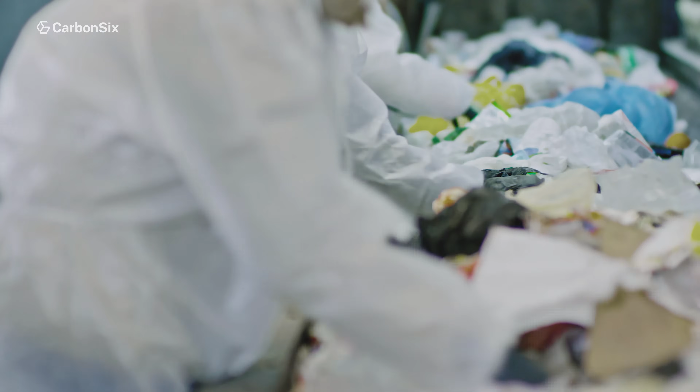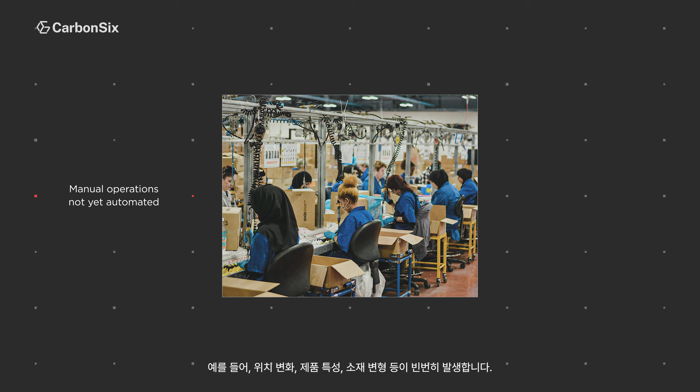In real-world manufacturing, many types of variances arise that present significant challenges to traditional automation solutions, such as variance in position, product, or material deformation.

How do we teach our robots to respond to these varying conditions? It would be costly if we had to use pendants or hand guiding to manually design the robot response every time something changes. SigmaKit is an AI-powered robot control system built to overcome these challenges.

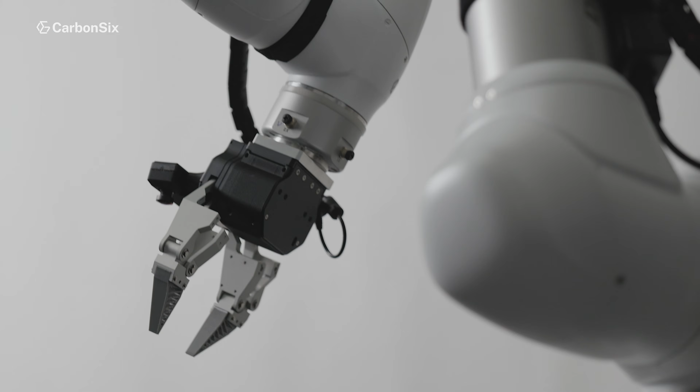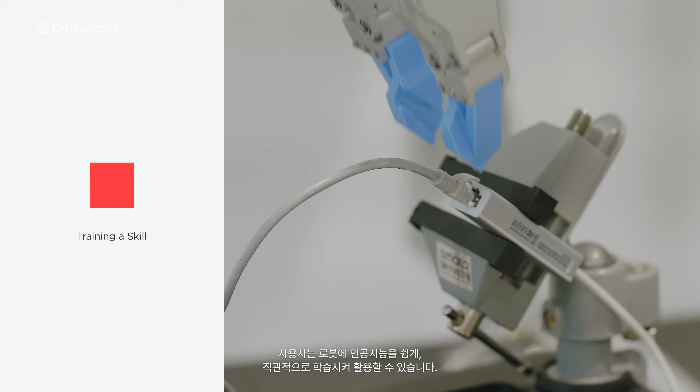Robots trained with SigmaKit respond instantly to unstructured and unpredictable conditions. Robots can be trained quickly and intuitively. No coding, no expertise required.

Developed by CarbonSix, SigmaKit combines cutting-edge physical AI and robot dexterity into a ready-to-deploy kit for industrial robots.

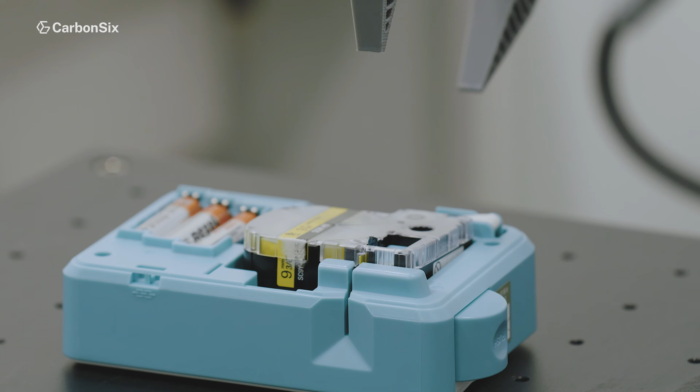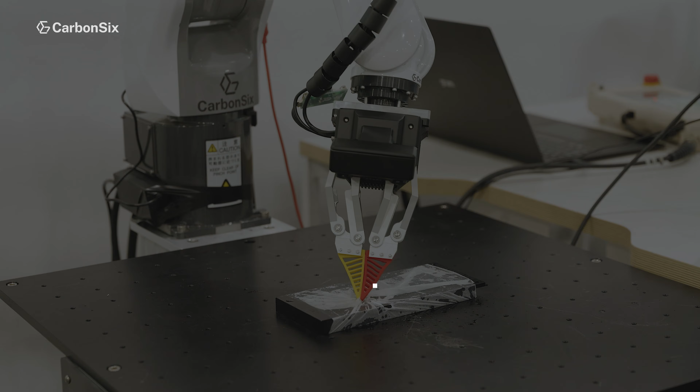With SigmaKit, robots can handle a wide range of tasks: assembly, machine loading, rearrangement, attaching and detaching, hanging, picking—even transparent objects—and more.

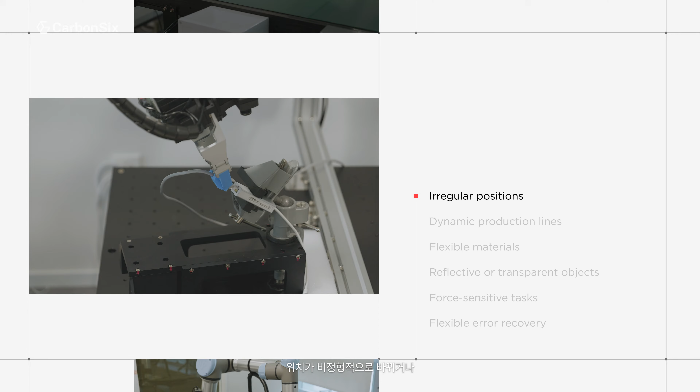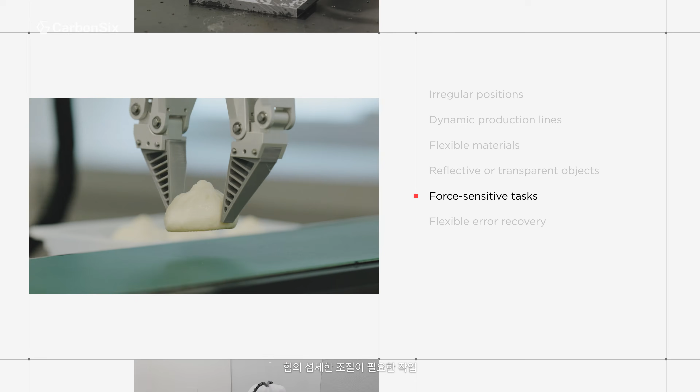Unlike conventional solutions, SigmaKit adapts seamlessly to irregular positions, dynamic production lines, flexible materials, reflective or transparent objects, and force-sensitive tasks. It is also capable in tasks where flexible error recovery is essential. In every case, SigmaKit responds like a human.

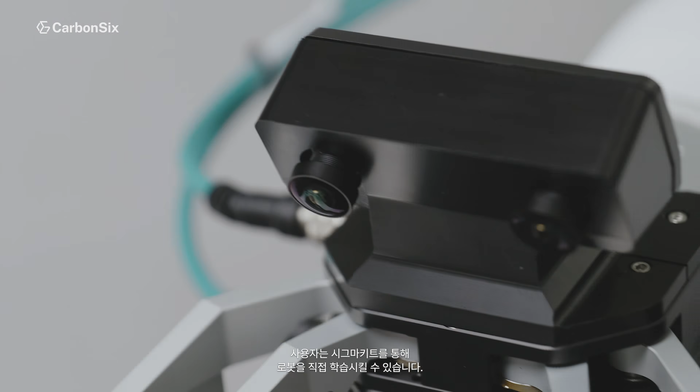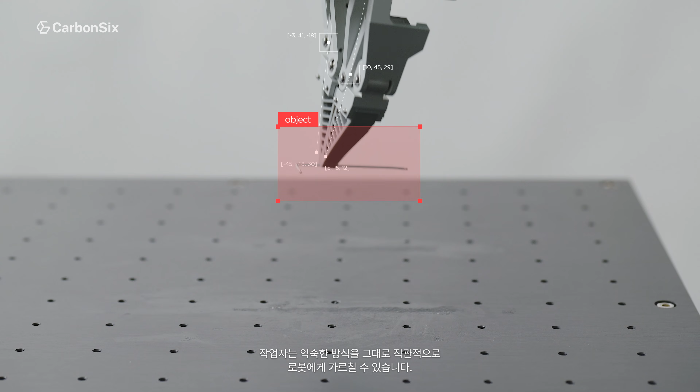Operators can teach robots simply by demonstration. By watching a few short demonstrations, SigmaKit learns how to respond. No complex programming, no heavy equipment, no AI expertise required—just an intuitive, hands-on approach that mirrors how operators already work.

We'll demonstrate with a simple task: inserting a cartridge into a label maker.

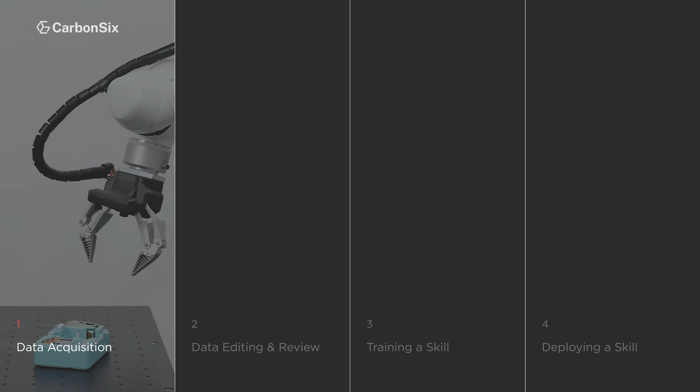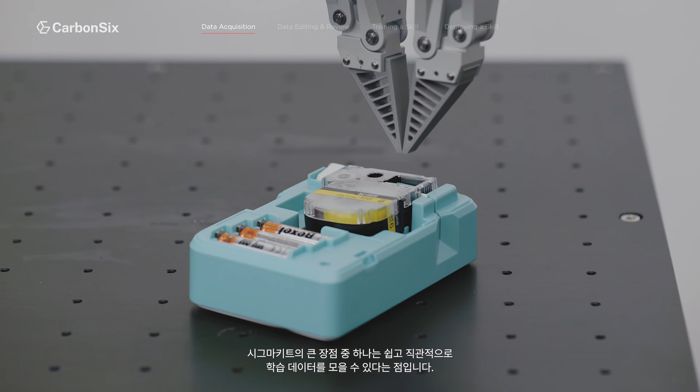Using simple data collection tools, robots can be remotely operated while recording task-specific videos and robot motion. One of SigmaKit's greatest strengths is how easy and intuitive data collection becomes. In many cases, just a day of training is enough to generate a model with good performance.

Because training is based on real operator actions, the robot also inherits subtle know-how and the ability to adapt to variable conditions.

For more effective training, SigmaKit includes tools to filter and review data, removing unnecessary inputs and editing recordings to improve training efficiency.

Captured images and motion data are then transformed into robot intelligence that we call skills. These models can be deployed directly to robots and tested immediately.

Once training is complete, the models can be exported and applied on the factory floor without delay. SigmaKit ensures robot performance that faithfully reflects human demonstrations, enabling smooth handling of diverse scenarios that might arise in the real world.

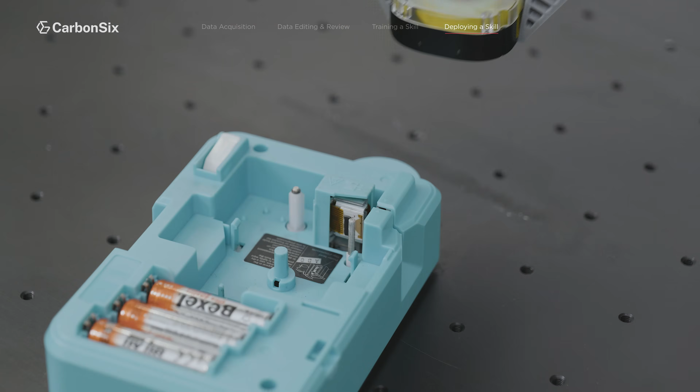Tasks once considered impossible to automate are now within reach. With SigmaKit, you can conquer the challenges of high-variance automation.